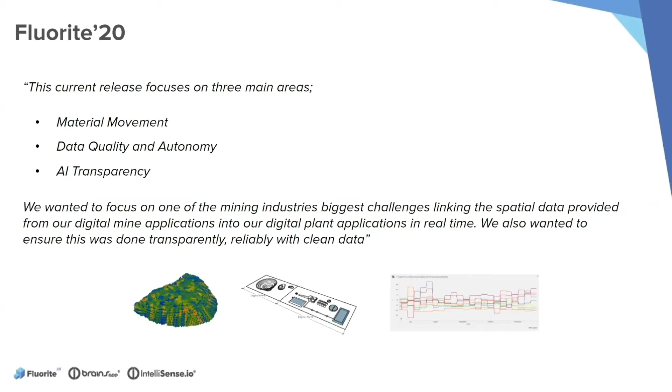So what have we looked at in Fluorite 20? I've highlighted the three main topics here that Sam has also brought up throughout his vision. And I just wanted to highlight quickly that we are here to help. We are here to solve challenges.

And I think personally, we took on one of the biggest challenges in mining, which is to do with this link between spatial data and time series data, normally related to geology and mining, and then processing and refinement of the material. Often this is linked to data being siloed from geologists all the way through to those working in the plant.

However, as our applications mature in each area of the mine, we are able to make this link finally. And I think that allows this transparency we've been talking about in AI, so that we can all speak the same language within mining. I'm personally a metallurgist by training, and it's great to be able to talk to a geologist about how exactly material affects my process.

To do this, I think there's a number of hurdles which I've highlighted here. To name one, data comes to mind. I don't think mining has a problem collecting data. However, I do think due to its nature, the data is often of varying quality.

And so what IntelliSense has tried to do is to make sure that we overcome that by filtering, and even in some cases, replacing that data to ensure the recommendations that you get from our IntelliSense applications are both robust and accurate, and therefore are trusted by those who use it.

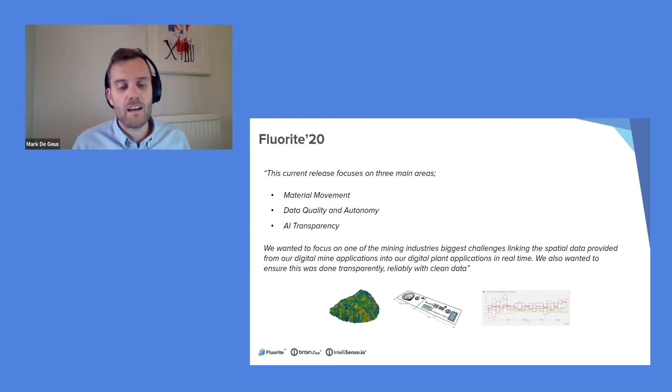The first topic that I'm going to talk about today is that idea of linking spatial and time series data. The thing that I will highlight is the material movement. And we'll start upstream and we'll make our way downstream throughout this presentation.

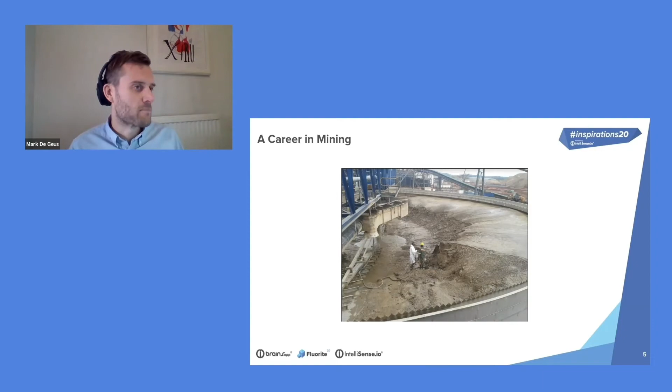And so let's get going. Let's jump into our product and let's get started with demonstrating this first step, which is looking at the material and how we can take spatial data and move it along. So I'm going to open the Brains app now. Okay, so let's log into Brains app. Brains app has a secure login. It's available in multiple languages and it's available on any browser.

So I've jumped straight into one of our solution panels, which are a combination of all of our widgets, and they're here to tell a story to you guys. So the IntelliSense products, as I've shown here in this opening widget, are split across multiple product groups representing the mining value chain. For this solution panel, I'm going to focus on the digital mine. So each one of our applications represents a process. And for the start of this solution panel, I'm going to talk about the Stockpile application.

And so the Stockpile application represents stockpile management, which for years within the mining industry has often been either a mystery or of less value to mines, or essentially discounted as just a side to our main feed to the plant. And for this reason has been modeled and approached in the same way without real focus. However, if you want to understand the value inside a stockpile, the industry standard used to date has been the weighted average model, or as we call it, the WAM.

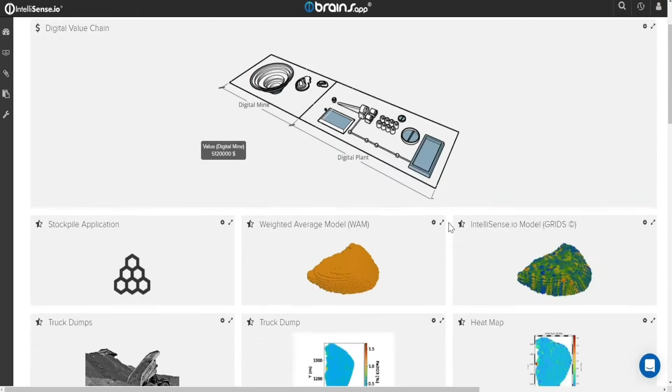The outputs of that, however, are not good enough if you're trying to find value and digitalize your mine. The outputs are shown here. They're often just a homogeneous set of properties given to an entire set of resources. However, the IntelliSense modeling approach using grids accurately models in real time the stockpiling process. This obviously has its challenges to do with data quality, filling even of data where required. And the outputs you can see here are this almost rainbow set of blocks, which are made up of multiple different properties. So how do we get here?

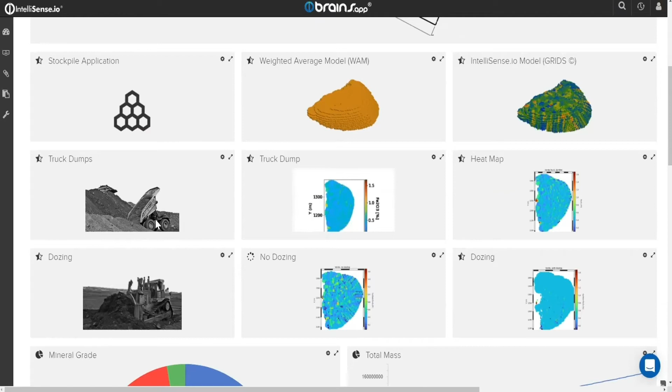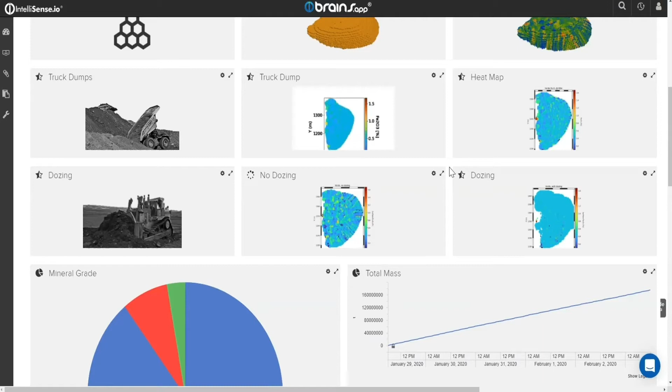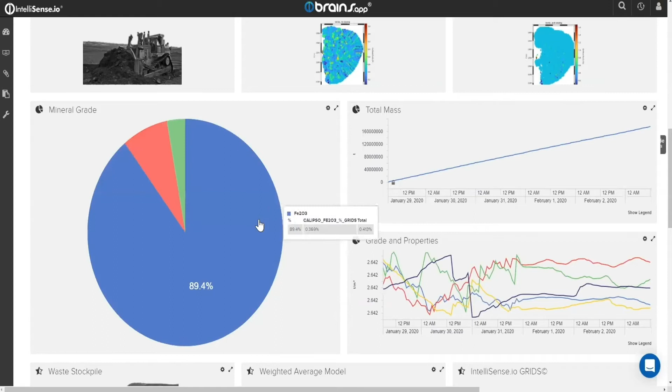As I said, there's a number of challenges to get here, including data, but realistically what we are doing is simulating and modeling truck dumps, you can see here, as well as dozing, which is often an ad hoc solution to the top of a stockpile, which can cause inaccuracies. The result of this is now that I am able to understand not only the total mass inside my stockpile, but also every single one of my grades and properties, including densities, all in real time and to a higher degree of accuracy than I could have ever imagined using the weighted average model. You can see here the breakdown of the mineral grade.

This is not only applicable to value-based stockpiles. A lot of people, when they see mines from space and when we see pictures of mines, we see these gigantic man-made mountains and structures. And a lot of these are waste stockpiles. The same approach can be taken to these waste stockpiles. As you can see here, we can take the total mass and we can take the grade of these different properties.

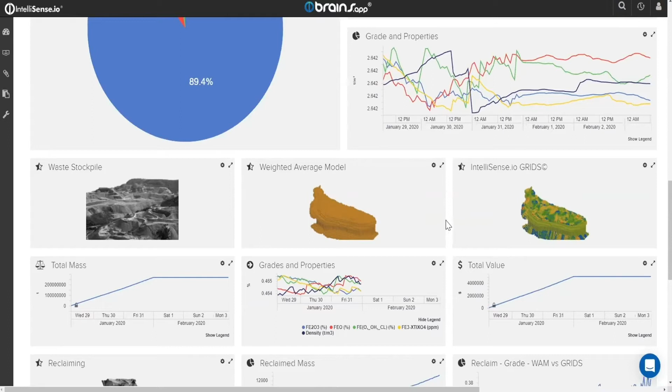An interesting approach to this, not only with the valuable stockpiles but also the waste stockpiles, is that we can then calculate the total value within a stockpile in terms of actual dollar amounts, which is an interesting way of seeing waste stockpiles in a new light.

Once a stockpile has been there for some time, we obviously need to reclaim it. So the action of reclaiming is then modeled as well within the stockpiling app. So you can see here the reclaim of mass. And really what is interesting is when we start to look at the differences between WAM and grids.

And so you can see as you're taking material from the stockpile, the weighted average model is this homogeneous set grade. However, with the grids, as you can see the different blocks of different properties are being extracted, you can see a variability which is incredibly valuable downstream of your stockpiling process.

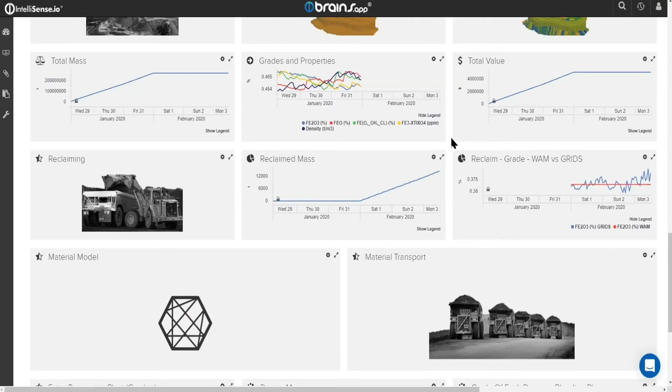Now that this has been taken out of our stockpile, we now need to transport it to a destination. This is where I'm going to introduce you all to the material model. The material model is our way of tracking material. It's both physical and geometallurgical properties that we can track over time. In this case, we've taken that material and we've dumped it into a crusher. So one portion of the reclaimed mass that I have here is sent to a crusher, or the start of our processing plant.

What's really interesting here is that we can now look at a planned versus an actual in real time, which is fantastic for those in reconciliation, as well as looking at the grade of each dump, and the difference between grids and WAM as well is obvious. The other thing that we can do is see how this works with a blending plan, so we can really advance our planning. What I've shown you here is very operational, really real-time insights.

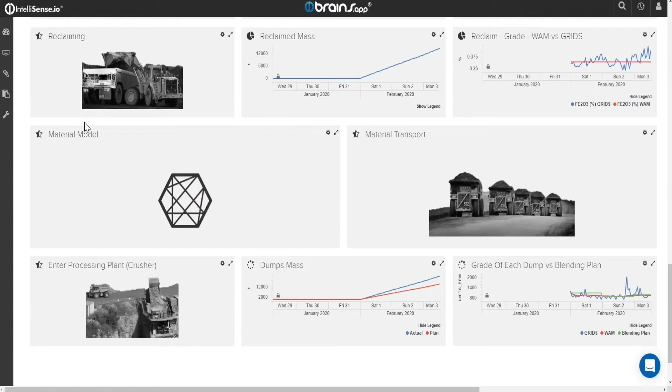However, it's the end of the month, and as a geologist, or even as a shift, I need to now report this information. So quite easily, any of these solution panels or dashboards can be turned into reports. And so I'm using here now a wider variety of some of our widgets to show new information that maybe is required for reporting. So these can now be used in a number of different ways. So I can download this, save it to my files as a PDF, for example, opening it here.

If that's not required, the idea of interoperability or using that data elsewhere can also come into play. For that purpose, I can also download it as a CSV. However, I don't want to do this ad hoc. I'd like to report on a regular basis.

And so quite easily, I can come here and set up a new subscription in which I select the dashboard of my stockpile report. I want it as a PDF every day at midday for the past 12 hours, and I'll have that delivered to myself by email. That will now come through every day, therefore saving me huge amounts of time.

In terms of interoperability, the last step is now using the stockpile for planning. We now have this 3D visual, so how can I use that elsewhere? So the IntelliSense models are 100% interoperable with other mining softwares, whether it be a geological software or a mine planning software.

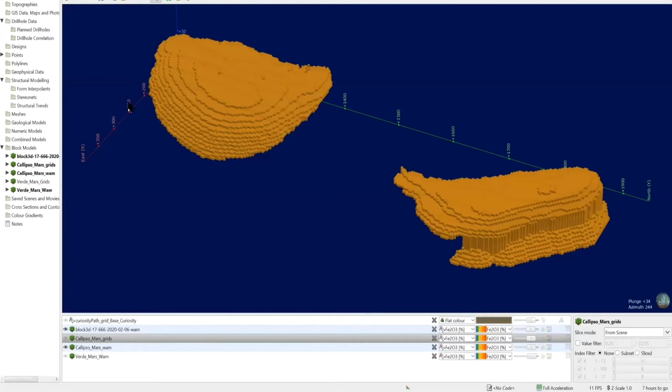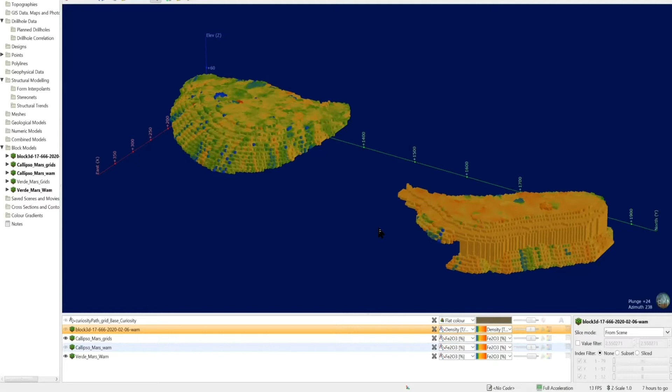I'll just bring up a really commonly used visualization software in geology, which is Leapfrog. And you can see here the block model in 3 dimensions of the 2 stockpiles. So this really highlights as well, if I switch between WAM and my original grids model, you can see the differences here in every single one of my properties that I want to look at. Therefore, allowing me to have much better planning and much better accuracy in terms of return on investment.

So I've talked about the material upstream of a processing plant. Now let's get into the processing plant and how we can use that new data to enhance and ensure that we get the most recovery out of our metal.

To do that, I think we address the point of data quality and autonomy here. It's always great to show some real life examples of the product in use on different mine sites. You can see here 3 different operators using our Brains app product.

I personally like the phrase in terms of data, that data is a new gold. I then question when we meet some of our gold miners, does that mean that data is just gold or is new gold? I don't understand, but let's talk about data. So people talk about getting more data, right?

Often it can be difficult to get more data. These are inhospitable places, lack of Wi-Fi, things like that. So how do we actually get more data? That's one question. And then if we get more data, how can we use it better?

There's another point that I think is another source of new data, which can be engineers currently use a lot of simulators. And for me, they're very complicated. And I don't know how many people are trained in using simulators and things like that, but often at times they're making a very complicated process into an overly complicated software.

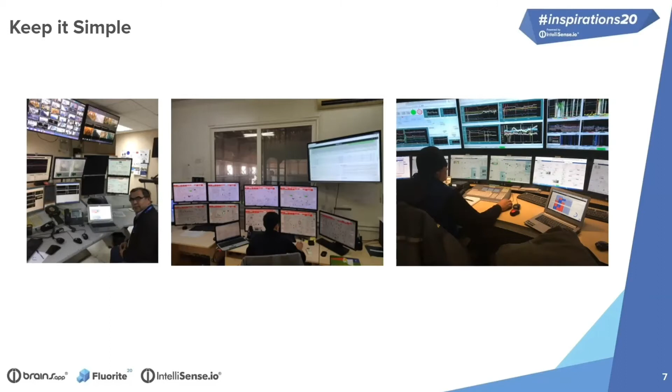Google managed to summarize the internet into a single search field. And I think mining can be the same, can be applied to mining. I think IntelliSense.io really aims to do that for mining, to try and take something that is extremely complicated and turn it into something simple to use. So let's get into the product and show you how we use data, create data, and make it simple for everybody.

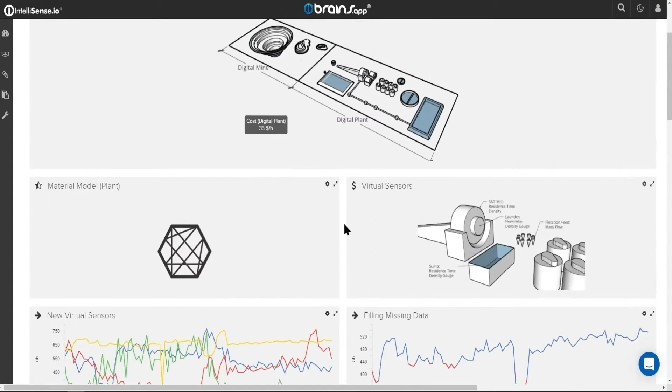So I've arrived at another solution panel here, identifying the material model for the plant and the grinding application. So I'm now moving into this area of a mine. The material model that we talked about in the previous solution panel continues into the plant, taking a number of different areas and getting more granular at this stage.

What I've done here is shown you a set of variables that would be close to impossible to monitor in real time, not only through the inhospitable nature of, for example, inside a SAG mill, but also the flow of material outside of that SAG mill, the residence times inside some of these. And you can see here that I've produced what we call virtual sensors, all in real time for some of these variables that I've just talked about. Cyclone discharge, the feed to the flotation, and some of the residence times. So I've created new valuable data for operators and engineers to use.

However, also at times, because we do a dynamic mass balance of the entire circuit, we obviously generate the same data as potentially you are monitoring. So in this case, what I'm showing you is the material model output as well as the actual output. And you can see here I've highlighted areas where maybe the instrumentation is off for a short period of time. You can see that the material model or the virtual sensor takes over and fills this data. So this means that you can now continue to use your controls if, for example, they're reliant on a variable, and you can continue to make the same decisions as if all the instrumentations were correctly working.

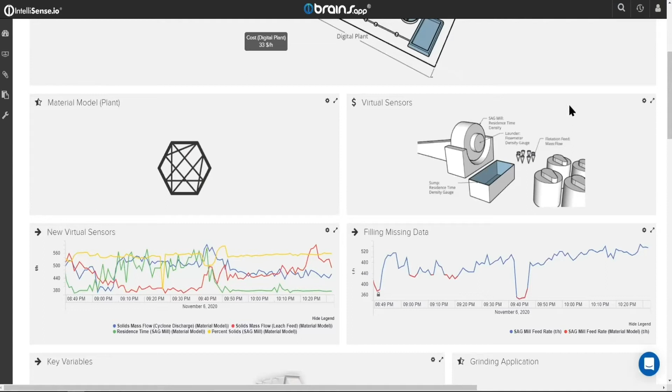The question that comes to mind, which is, this is all based upon instrumentation data from the laboratory, things like that. How do I ensure that that data is accurate? And so within Brains app, we provide a configurable reconciliation application. So if I take the grinding circuit, which is here, and I look at the information on this asset, and again, I go to the files, which gives me all the information about the grinding circuit, I can see the reconciliation which is being generated automatically. This is simply set up and configured by the user and can be used to identify different reconciliation characteristics.

IntelliSense reconciliation then runs through up to 500,000 simulations until it reaches 20,000 solved solutions until it gives you a set of reconciled values. That is a lot of processing power to achieve this.

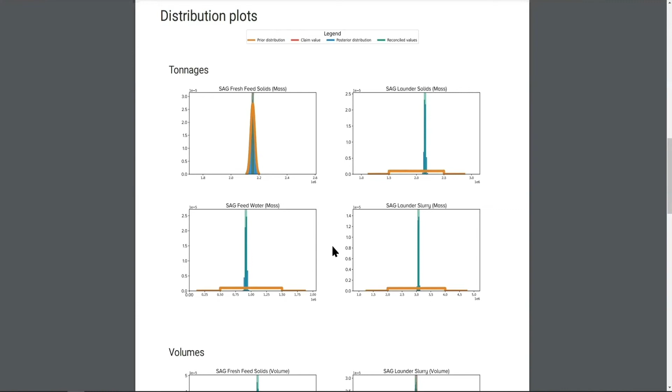Let's have a look at what happens if things don't go so well. So in this case, my plant, it may be the next month, for example. I do the same process. I fill in the variables that I know, and I fill in my claims. However, in this case, the reconciler, even through all of those potential millions of solution findings, could not come to a solution.

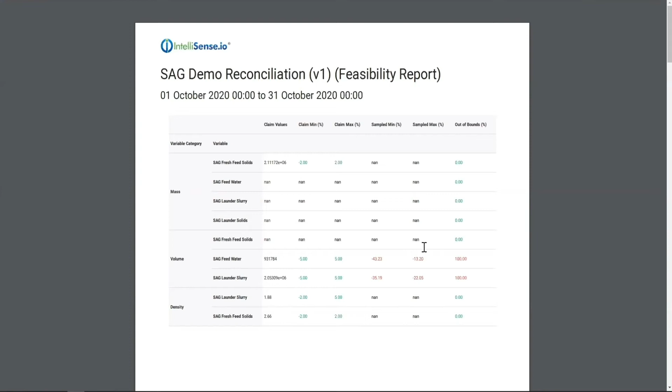And you can see here that we're 100% out of the bounds that we set. So what I have here is the warnings of which variables are not featured within my bounds. So if I scroll down, you can see the two here. So through our reconciliation, we've found the whole distribution of the curve of all of our solutions.

And we can see that obviously in this case, one of our variables, whether it be an instrument, whether it be a sampling process for these SAG launder slurries, may be completely out of our bounds. And therefore, we may need to go look at that instrument or check our reconciliation. And so now I can generate these every month.

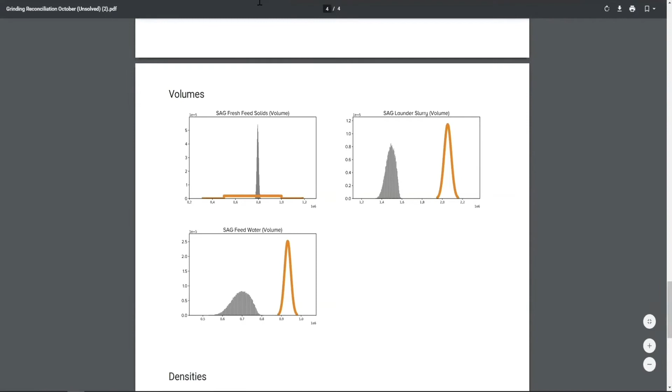On a normal basis, however, reconciliation is often done by an extremely trained metallurgist who uses Excel. I guarantee you that Excel could not produce distributions of up to 20,000 solutions, nor could it take the processing power and speed at which these are done every month. So this is one of our great add-ons, which comes with Brains app out of the box to provide you with value, not only from our applications, but also from our platform.

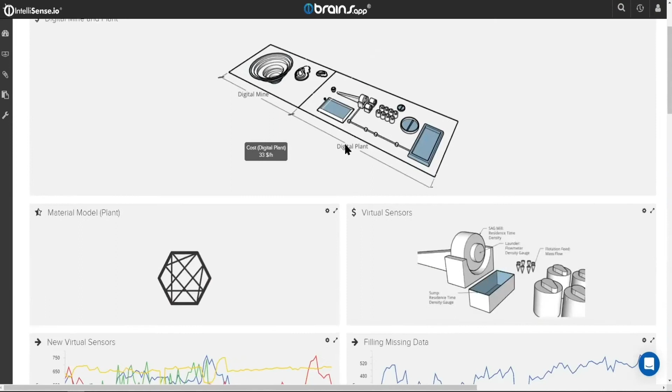If I go back into the world of grinding, now that I'm confident in my instrumentation and I'm ready to go, I'll continue down and look at the grinding and comminution circuit itself. So once we mine for rock, we need to break it down into smaller particles to get out the valuable mineral. And we use very large drums to do that.

These are hugely energy intensive. I think a small percentage of the world's power is used to comminute or reduce the size of rocks. And it is an incredibly energy intensive process. So the better we can make it, the better really for the planet overall.

One of the things that's done is we put inside the grinding circuit a set of steel balls. These steel balls we often refer to as a charge, i.e. the percentage of mass inside my SAG mill, which is made up of balls. There's an ideal case for this. There's a number of balls that we need to maximize the particle size distribution coming out of the mill.

So we're grinding material down to the perfect size so that we're not over grinding it using too much energy, but we're also not under grinding it and allowing less liberation. So knowing this is hugely valuable in an operational sense in real time.

To give context, the only other way to find out this charge is by stopping the mill entirely, stopping throughput and valuable material coming through your SAG mill and coming out the other end. And so often a set of operators or employees will get into the SAG mill and measure this manually. So if we can stop these shutdowns, we're ensuring that the throughput remains consistent. Less stoppages means more throughput.

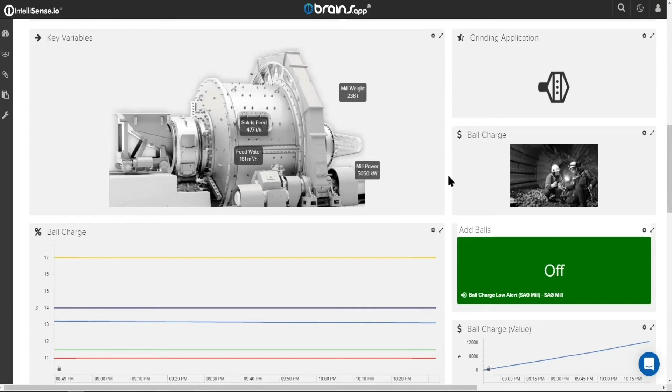So as a simple example, I've shown you here the different ball charges and their limits. And so if I zoom out a small bit, you can see over time how my ball charge changes within the limits. You can see in maybe these areas where I'm looking at lower ball charges, the add balls alert widget will flash red.

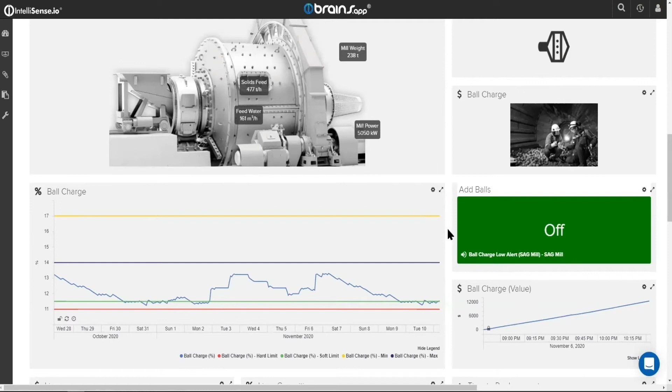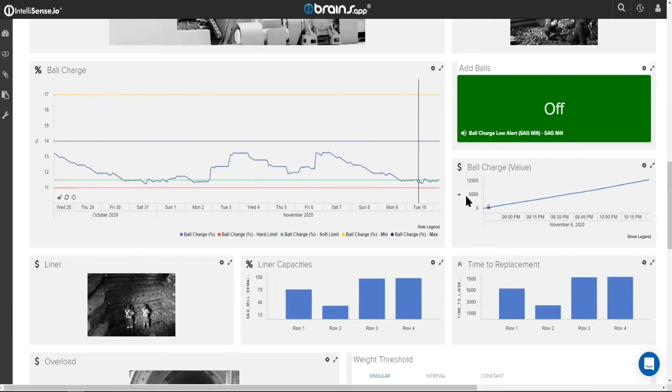The other area of concern in the area of grinding is the liner, ensuring that the liner capacities are maintained. And so we model this also in real time, converting the percentage wear into useful insights in terms of how many hours it is until you need to shut down your mill.

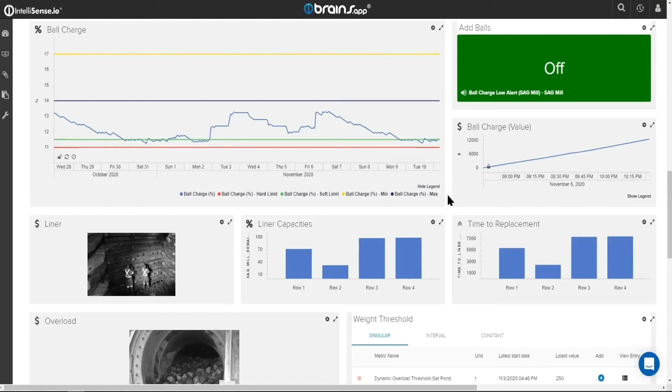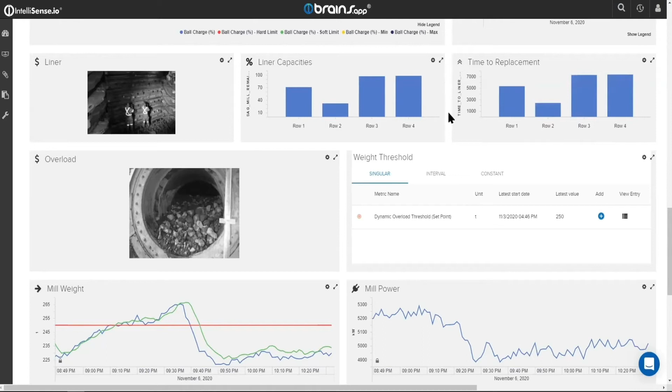This is all useful information in terms of asset predictive maintenance here, as I've indirectly highlighted. The question might be, why are we doing this? Surely you want to optimize a SAG mill using your classic machine learning. I think one of the main reasons we do this is that everybody and a number of consulting companies can take a large set of data, put it into an off-the-shelf machine learning model and produce outputs.

However, we all know that both the material going through that piece of equipment and the status of the equipment itself is required to get accurate answers in terms of predictions of the future. This is what really makes IntelliSense and Brains.app a mining product, is that we ensure that we know the status of each equipment as well, which can be used by our more complicated AI models. So in this case, the model is able to understand the status of the equipment as well as the material.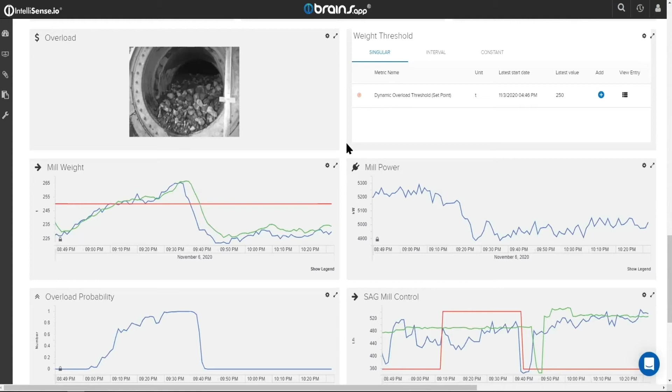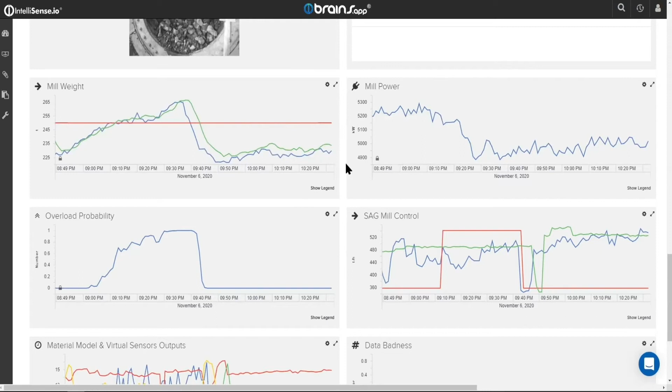In this case, I'm showing you an overload. An overload event is when the material coming in is too heavy and we cannot process it. What happens is the weight goes up, the power goes up, and eventually the material cannot make it through the SAG mill. So in this case, I'm just showing you a simple example of where the weight has gone up. Our predictions have said that our power is going up. And you can see here our overload probability has also gone up. In that case, you can see the overload alert in red has come on, at about 9:15 in this case.

These are my control variables that I'm showing you in blue and in green. An operator needs to react to reduce this. However, you can see the reaction in terms of reducing the feed rate, how much material and flow rate, is about half an hour later after the original alert is given. So this will then cause instabilities later on.

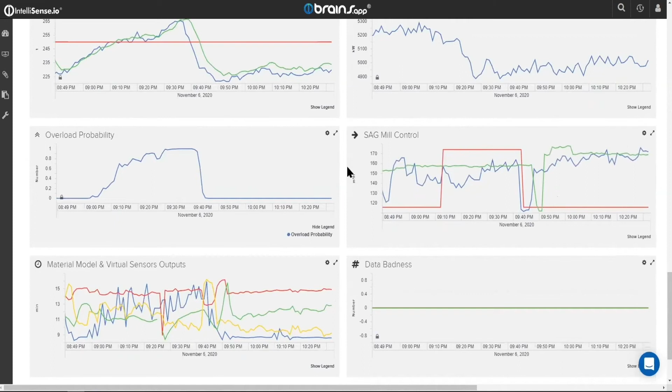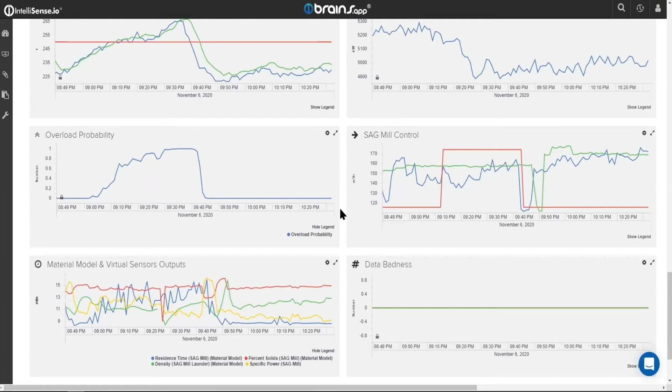The final step of this is obviously all of this is enhanced with that material model and virtual sensor outputs. So I'm showing you here a number of different ones. You can see the residence time increasing, you can see the density increasing. So all of this really just allows an operator to make a better decision. I think one of the topics that we need to bring up is that an operator should not have to make decisions all the time. If decisions have been come to, and an operator trusts them, why not automate those decisions?

And so how do we deploy an AI solution, for example, within an existing OT network? This is a hugely challenging task. The computing power required to do the things that I've just shown you is vast. There are security issues around putting new data generating models on a mine site. And there's also the classic one of internet as well. The internet makes all of this possible. However, on a mine site, if the internet drops, which it often does, it's not ideal. So how do we build that robustness into this?

So what IntelliSense has done as an industry first is deployed our AI models on the OT network on a compact version of Brains App, which we call Brains App Lite. This means that the data, the recommendations that I've just been showing you, are all reliably coming in. The data collection as well can be done reliably, and all of the machine learning training and things like that can be sent to the cloud and processed using all of the power that we have. We can then update Brains App Lite to the latest optimizer and allow it to continue to provide recommendations, not only to an interface, but also with existing control systems.

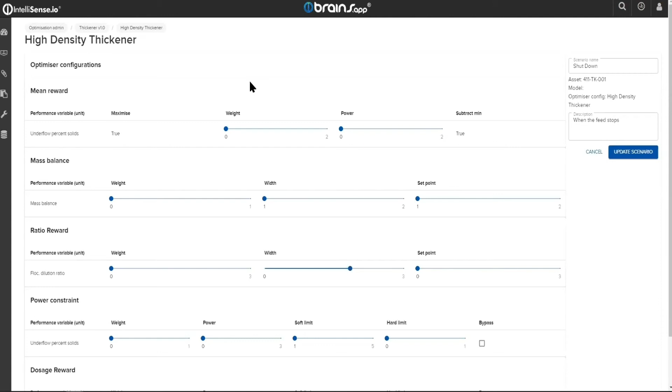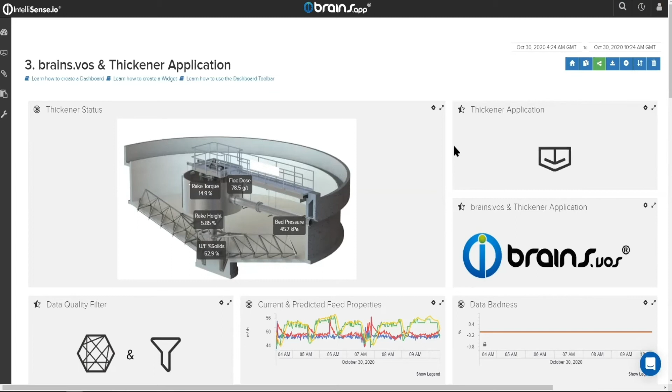To explain a thickener very briefly, it is a liquid solid separation process where a slurry comes in, which is a mix of solids and liquids, and we need to recover the water. If we take Chile as an example, water is very valuable. We need to ensure that it is recovered and used again. And so to do so, we need to ensure that the underflow percent solids that we achieve is as high as possible.

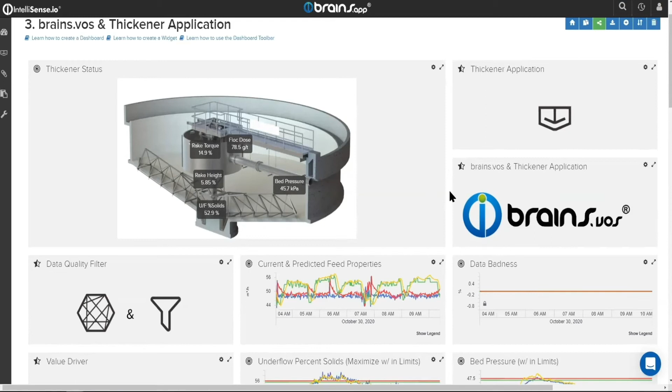What I'm introducing you to here is Brains VOS, our virtual operations simulator. We often call this inside IntelliSense our little time machine. It's a historian of the future and is our powerful what-if tool. This can be run non-intrusively, and it can be used to simulate different control regimes and to see what our optimizer is thinking. It's an extremely powerful tool in the battle for AI transparency.

The first thing I'd like to highlight is an example of it being used. First thing I've done is I've gotten all of my feed variables from my material model and the predicted state of those. So I now know my feed flow rate now, and I know my feed flow rate at T plus 55 minutes into the future. So I can make predictions. I know what's coming. I can now predict what to do next. At present, my data is really good. I don't have any quality issues with my data.

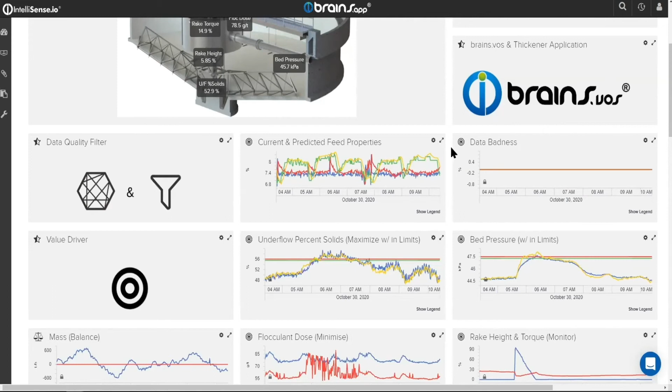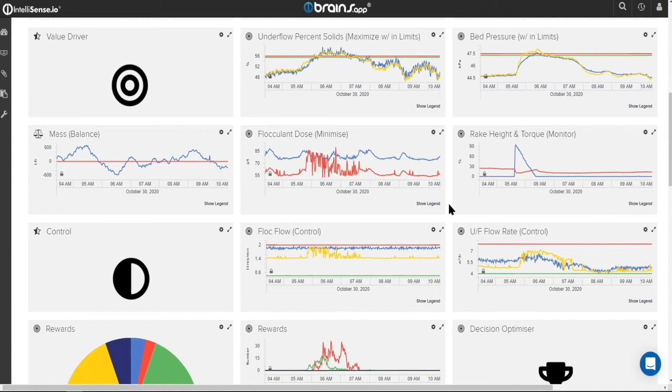So let's get started and try to achieve the highest value that we set in our rewards. In this case, I'd like to maximize my underflow percent solids, i.e. this blue line, but making sure that it stays within those limits that I've set there. My bed pressure, again, I'd like to make sure it stays within the limits. I'd like to keep my mass at 0, perfect balance between input and output.

To minimize my flocculant: it's an expensive chemical, and so we want to ensure that we don't put too much of that in. And then we want to ensure that our rake height and torque are maintained. What I've shown you in the majority of these cases are the underflow percent solids as it is today and a predicted state. So what will my underflow percent solids be 55 minutes from now? Which is again an incredibly powerful tool to start us off.

So now that I've broken one of my constraints, I need to make a change. So I have two control variables in the thickener. I have the flow of the flocculant and the flow of the output stream. And so again, in the same theme, I'm showing you here the actual flow rate and what the optimizer would have done in this situation.

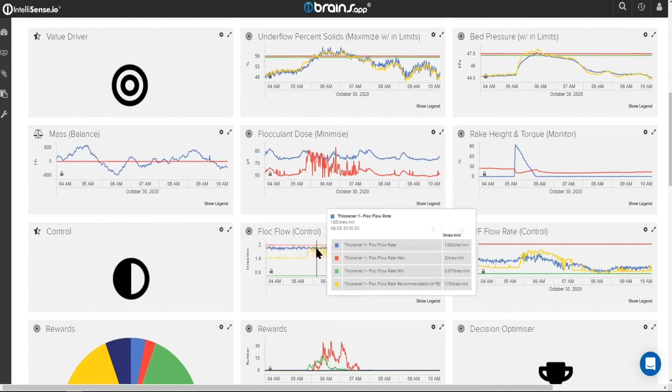But how did it come to this conclusion? How did it know to increase the flocculant flow rate and underflow? Well, let's try and get inside the mind of our optimizer. So we take our rewards here. What I've set up is a visual representation of all of those rewards.

And you can see during the times when I've broken the limit, the majority of my rewards or the concentration is making sure that constraint, 63% of my focus is on making sure that that constraint is not broken. 24% on that bed pressure constraint, and the rest take lower preferences. So that's how I came to that conclusion. And the underflow percent solids and the bed pressure, as a result, I can show the uncertainty of those.

So for example, if the model has not seen this set of data before, and it's not sure what to do next, the uncertainty can be too high. And so the operator can see, hey, we're not really too sure what to do right now. I'm unsure of what to do. We want a humble model. We like humble people. We like humble models. And so if the uncertainty gets too high, we obviously would not give a recommendation in that case.

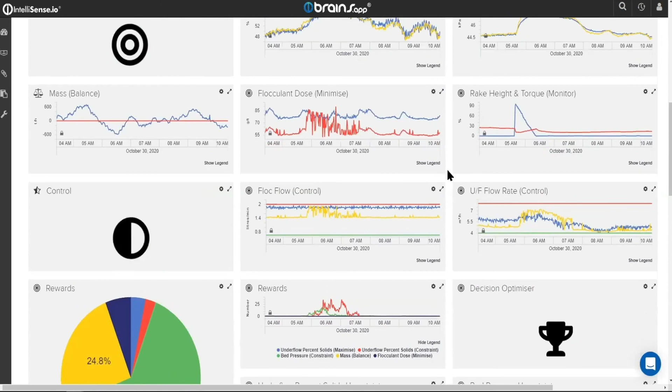But what's really interesting is that this is almost like a human brain thinking. And you could argue that, well, when I break my constraints, I probably don't need an AI model to tell me what to do next. However, let's take a quick look at maybe a timestamp when things were less obvious.

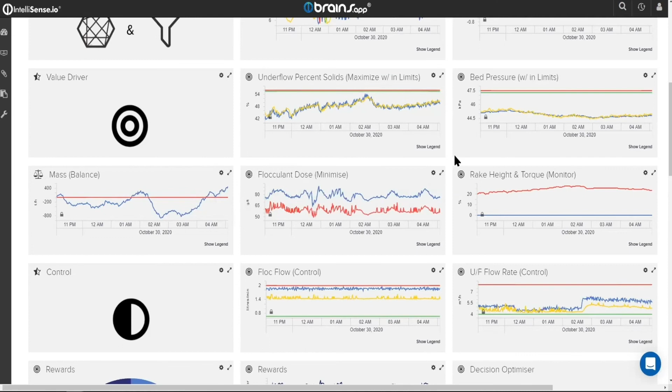So if I scroll back a few hours before, you can see here I'm plowing along as best as I can. Nothing really to report here. Well below my limits, trying to maximize my underflow percent solids, keeping my balance. Everything's going great. And so this is really where the rewards kick in. So this is where the human brain would have to take capacity and go, how can I balance everything that's going on here?

So for example, the numbers that I'm providing you, 47% of those will make sure that the flocculant dose is minimized. 40% will ensure that that underflow percent is maximized, and a small portion will ensure that the mass balance is maintained. So this is that transparency that we've added to our products.

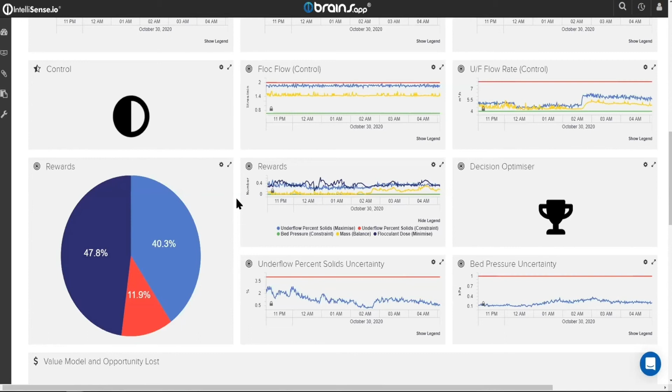But all of that is very useful for my operator, but what does it mean to my bottom line? Optimizers are here to ensure that I achieve the highest value. And so really listening to that optimizer, how do I know that I'm achieving the highest value? And so, as I said, all of our applications come with a financial model. And so what I'm showing you here is the actual and optimized cost of my flocculant in terms of dollars per hour, and the revenue I'm achieving based upon the actual and optimized states.

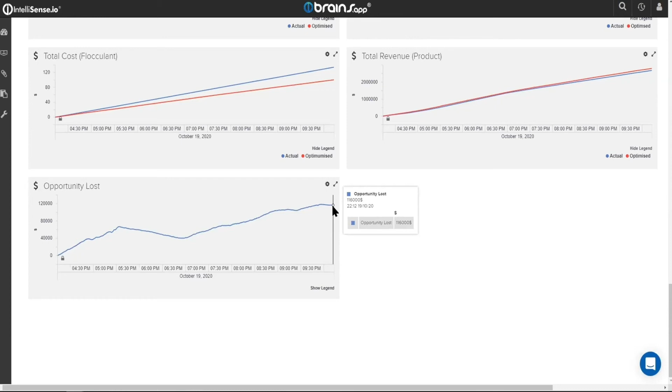I can then compare those two and accumulate them over time. So I'm taking a period here of a few hours, and I can see my opportunity lost. So in this case, I can look back in time. I can be retrospective and say, I should have done this. If I had done that, I would be sitting here with $116,000 more. And so bringing this back and ensuring that the opportunity lost is shown really adds to that transparency as well.

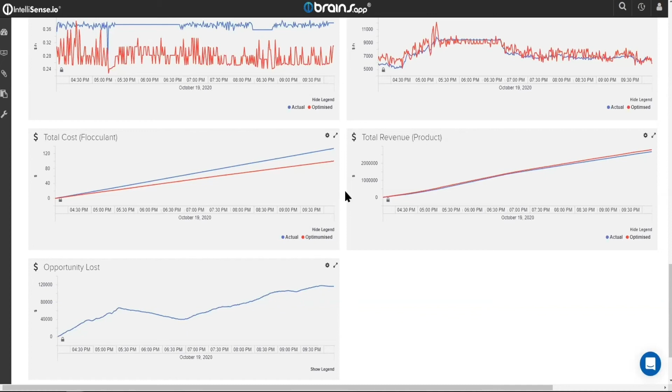What I've just shown you is complicated stuff. I would agree that most operators and engineers may struggle with some of these concepts, but IntelliSense is always here to help. And I would like to now introduce, in fact, the best way of helping everybody, which is through our little friend, the Brains Genius. So Brains Genius wanted to come and say hello to everybody to show you all what we can do to help, because this is the final step.

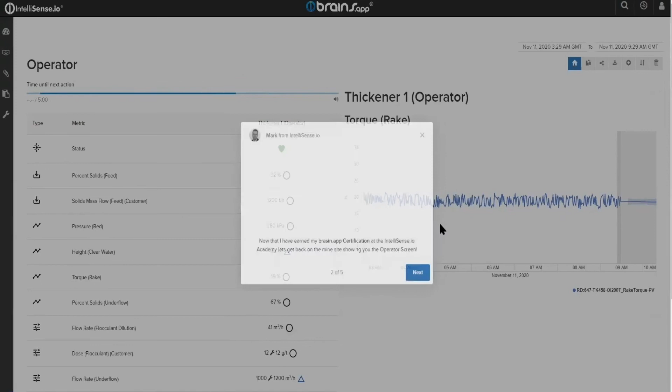So Brains Genius is here at all times. He can bring you not only to the IntelliSense Academy, which has a number of courses outlined for all users, ranging from small periods, and certification is provided once complete. Now that Brains Genius is gone and he successfully completed his certification at IntelliSense, let's get back to the mine site and do some practical help here.

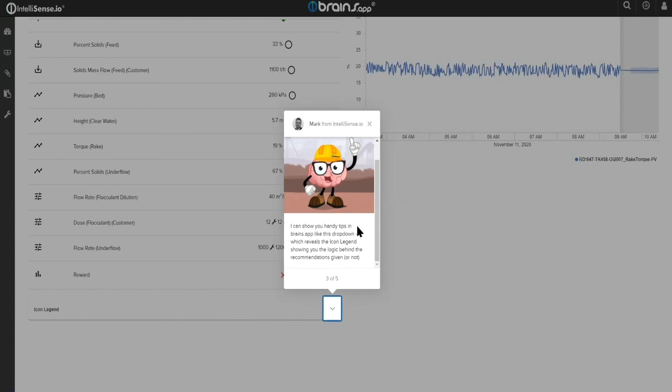So here he is inside Brains app guiding you. He's here to show you handy tips like this small drop down that reveals the icon legend in terms of the logic and the transparency behind what we've been given. If you're not happy with Brains app, we have a whole help center full of hints and tips. So I'll just quickly go to that now.

And what is really exciting is that I can show you all of the different articles we have on everything to do with AI and mining. But also what's really exciting, I think, is that we have the Fluorite 2020 release note here ready for you all. And all of the links, everything that I've talked about can be found here, discussing grinding, even some of the work on flotation that we've done. So please feel free to come and have a look at our release note as well.

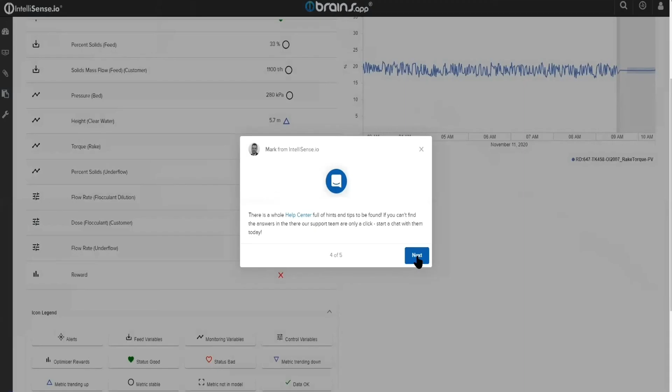If not, we also have a very friendly support chatbot as well. But Brains Genius is going to say goodbye for now. Thanks a million. He's really looking forward to graphite as well. I'm sure he'll have some kind of fantastic new onboarding approach to see from him.

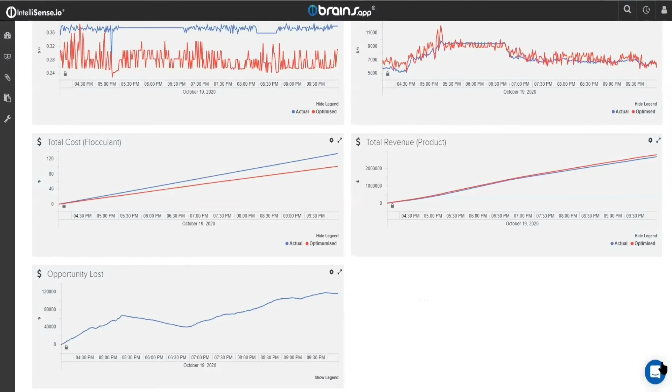So just to make everybody clear on that, while I'm in the product, I can click down here, I have a friendly chatbot in which I can start a conversation with IntelliSense, who will respond to me in about 30 minutes.

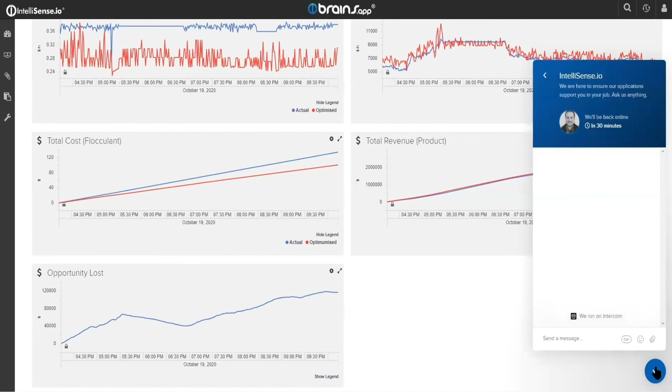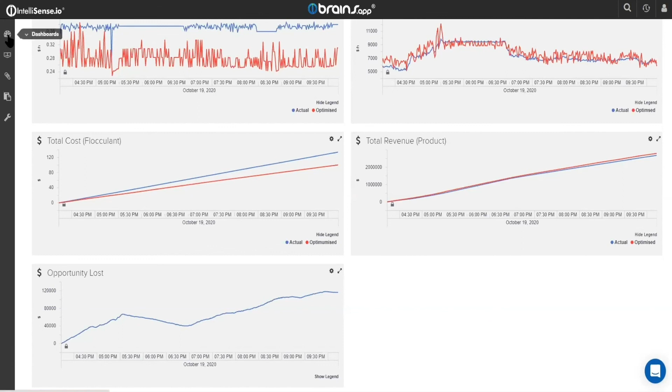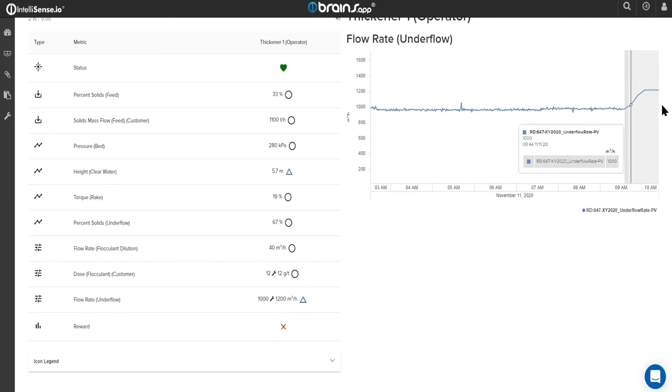Back to what we were talking about earlier with Brains Genius. So with Brains Genius, we were talking about the operator screen. This operator screen is designed for our operators, and it's like their small GPS. So what I'm showing you here is a quantitative way of showing outputs. This is showing you not only the change in my control variable that I would need to do into the future, this hashed area being the future, but also the effect it has and the uncertainty bands that it will happen.

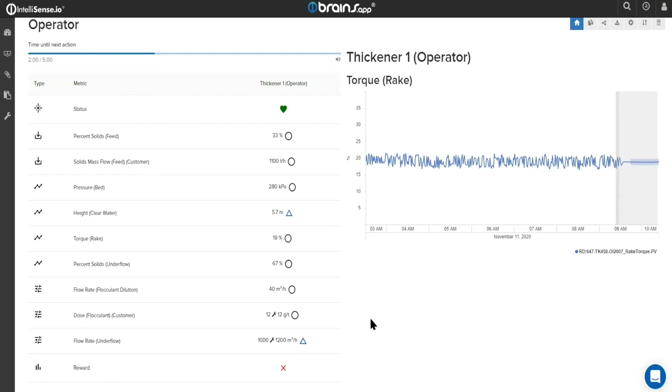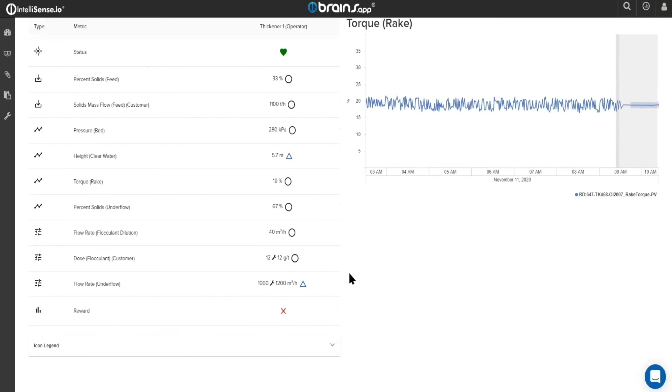So instead of saying, if you generally turn this up, this goes down, we're now going into the world of, if you turn this up by 10, you'll see this result. And as I said, that transparency that Brains Genius showed me is all here. You can see all the errors as to why we potentially would not provide you with a recommendation. Once the operator is trusted and happy with all of these, we can obviously deploy these through Brains App Lite on your OT network so that these recommendations are not provided to a human.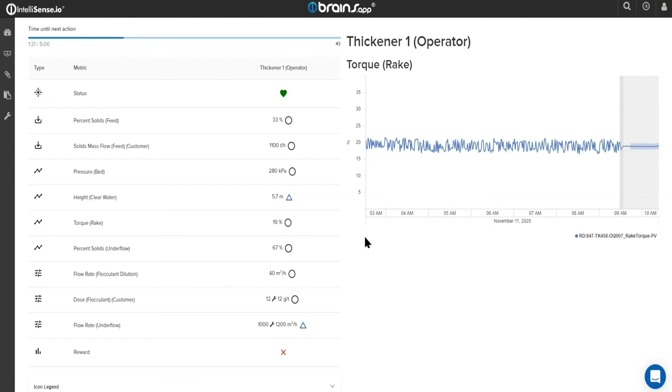The final piece that I'd like to talk about is a quick summary of what we've seen today. I've really talked about an industry that for me was challenging and hard. Mining is hard. It's not only an environment which is hard, but also it brings up so many challenges. And for me, the main focus of what makes mining hard, and therefore AI and what brains.app is trying to do hard, is the variability. So we've talked about the material movement, linking upstream to downstream, bringing more transparency, ensuring we're all speaking the same language, and taking that variability out of the equation.

Data in mining can be relatively abundant, but using it, generating the correct data, generating more data and quality in an automatic fashion is also hard. But IntelliSense ensures that every single one of their optimization applications comes with the highest transparency in terms of data quality and understanding what data is being used for each model. The third point is obviously the organizational change. And we've just shown you there how IntelliSense is trying to help, how IntelliSense is trying to make the next step for so many companies an easy transition.